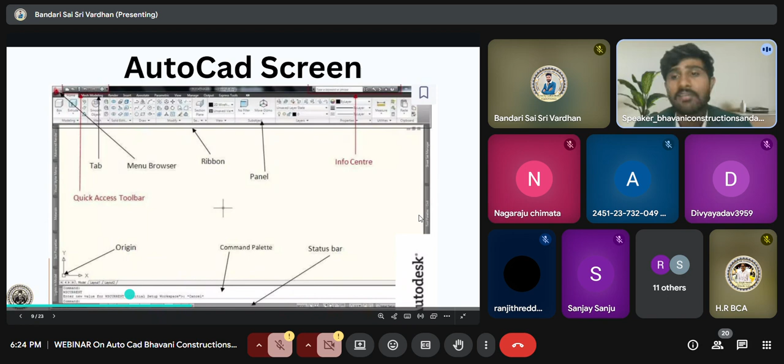At the bottom left corner, there is the origin. This is a very important thing in AutoCAD. Below that you'll have a command bar, and below that a status bar. On the right upper corner of your sheet there's a view cube, which allows you to view your drawing in different directions and elevations. This is the introduction to the interface.

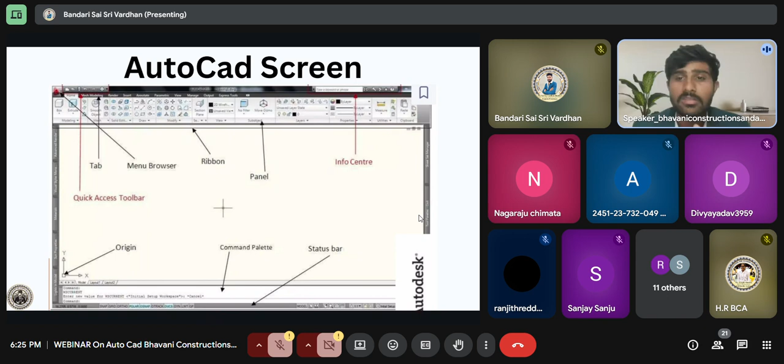Next we'll jump into some important things about AutoCAD. Let's take a look at how AutoCAD understands space. When we draw something like a floor plan section, we only need 2D, that's the x and y directions. By default, AutoCAD uses something called the World Coordinate System, or WCS. Think of it like an invisible flat surface, like the ground, where all your drawing starts.

Now if you want to draw in 3D, like adding heights or depths, you'll use something called the User Coordinate System, or UCS. This lets you change the orientation of your complete drawing plane. It's easy to do: just type UCS in the command bar and choose new, then pick 3 points to set your new plane. In simple words, WCS is your default 2D plane, and UCS is your customized 3D working plane. This gives you full control when working in 3D designs.

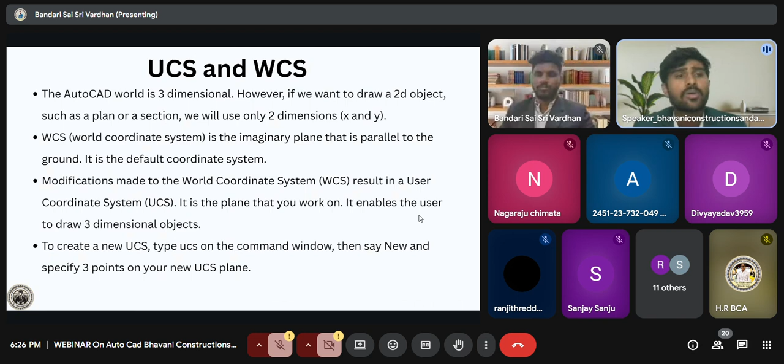Next we are going to talk about 2D drafting. In 2D drafting, we frequently use commands like line, offset, dim, array, layers, blocks, rectangle, hatch, and annotations. These are the main commands we use in 2D drafting. This is used in building plans, cross sections, structural layouts, and elevations too. The real-time applications of 2D drafting are mostly in urban layouts, highway alignments, and drainage plans.

One of the most important aspects in 2D drafting is layers.

Why it is most important: the layer system enables controlled visibility, line weights, and colors. These are crucial for separating architectural, structural, and service elements in professional drawings. Like when you draw a plan, you give layer names like column, wall, and separate layers for plumbing work and electrical work. It makes it very easy to understand your drawing.

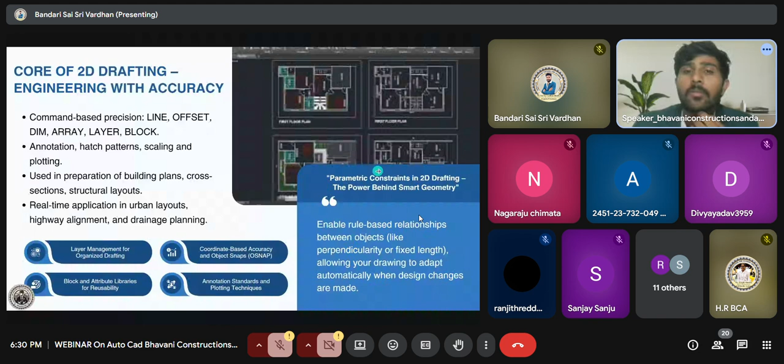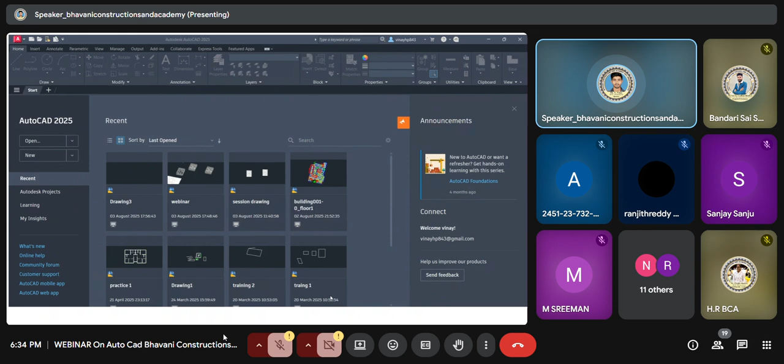As sir has explained the interface, how it looks and where we find all the ribbon and basic commands of AutoCAD - this is the place where, if you already have existing files, these files already exist with me in my laptop. I can use these files directly by clicking on the open command. But now I just want to draft a new drawing, so I'll come to this toolbar and click on the new command, and then you'll be able to start a new drawing.

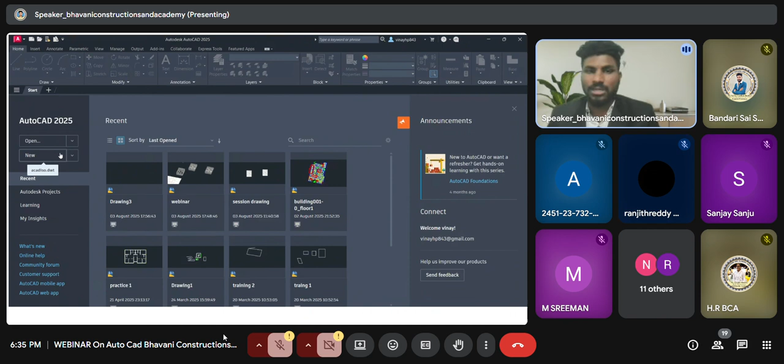As far as the session time is so constrained, we already have one drafted. We'll try to share the same. Let me open this one. Now, let me also give you a brief intro of the session.

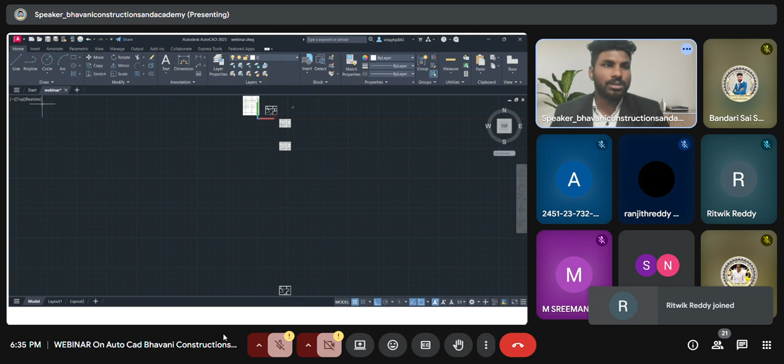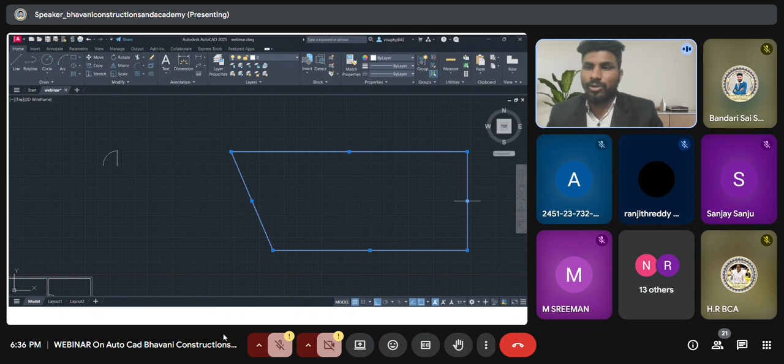So when you open your AutoCAD, you'll see the basic interface which we actually see on our desktop when you open AutoCAD. See, line, polyline - line is a command where you can draw n number of lines of different kinds. The difference between a line and a polyline is: when you draw a line to make some kind of shape, you need to manually select all four sides of the shape. But when you use a polyline, that constraint is removed - you draw the same kind of shape, but when you select the object, the whole object is selected.

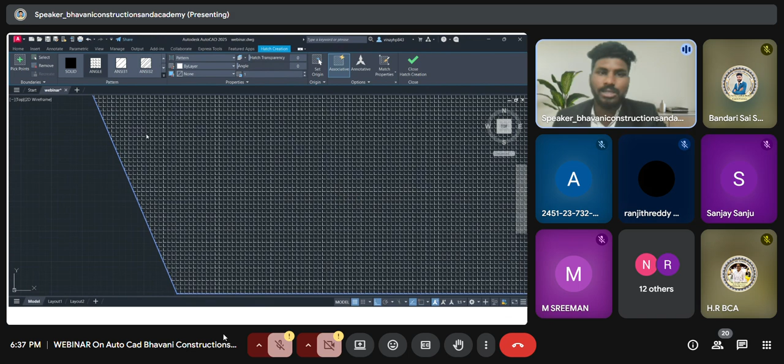This is called hatching. In civil terminologies, we have different kinds of hatching, like gradient hatch and normal hatch. For example, this is the hatch which I have given. We have different patterns of hatching - this pattern is for concrete, and this is for brick, with king closer and queen closer, different arrangements of bricks. So accordingly we give the hatching in CAD, and here we'll give some concrete hatching.

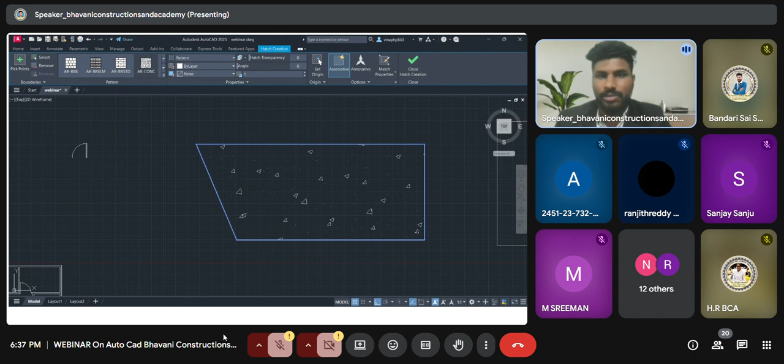Let us assume this is the drawing we have taken. This is the basic drawing plan already drafted according to the given plan on your left side. These can also be used from the setup. Generally, when you open, let us open a new tab.

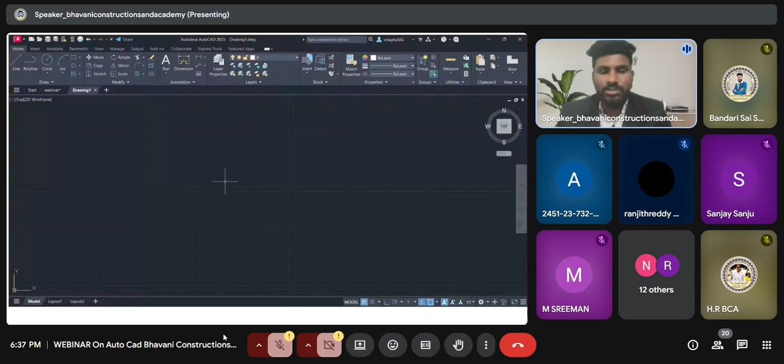Before, once you're on the interface of AutoCAD, we first give the units. Whenever you are opening, it is very important to give the units first. What units to give on AutoCAD? Generally as civil, or even mechanical, triple E, we generally use architectural. So we give the length type as architectural, then the precision as 0 to half inch, then the units as inches. This is the basic type of unit we generally give.

Once the units part is set, we need to give a grid. We are able to see on the screen now there are innumerable number of grids. AutoCAD is an endless sheet having innumerable grids - in either side you drag, you have innumerable grids.

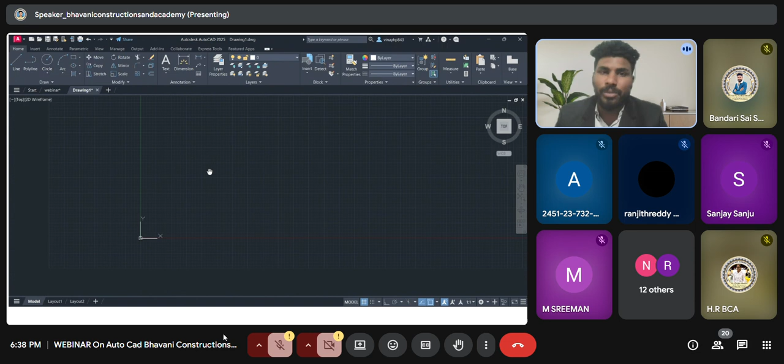So generally, what limits do we give? We enter the limit commands. Then the limit we give is 0 comma 0, that is at the center point of the coordinate, and the next point will be 500 comma 500. These are the x and y coordinates which we give to set the limit.

Once the limits were set and the units were set, now I want to draw a floor plan. Let's take the same floor plan - I'll just copy from my drawing and paste the same drawing back here. So now my plan has been placed over here. This is a 2D wireframe where I'm able to see a 2D diagram.

Now I want to change this into a 3D modeling where I should be able to see the height of the building, the rooms and all. So generally, to have a 3D view, we come to the bottom part of your page, to the right bottom part, where you'll see a command symbol of settings. There you'll see 3D basics, 3D modeling and all.

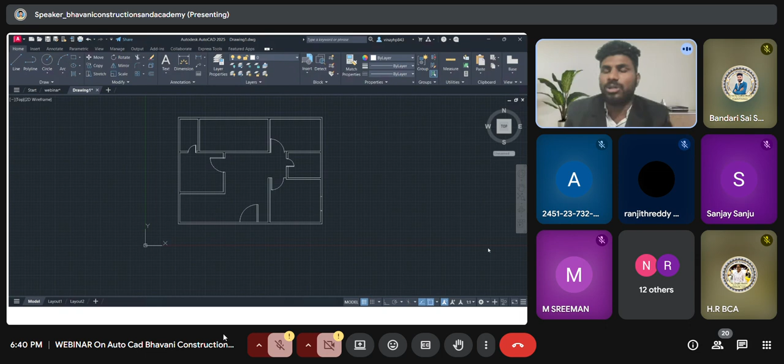Before going into the 3D modeling, let us first measure what is the length of the building. Generally you go to the ribbon where you have the dimension bar. You can directly select from here, or from the command tool you can select - if you give the dimension command, then you'll be getting the same tool.

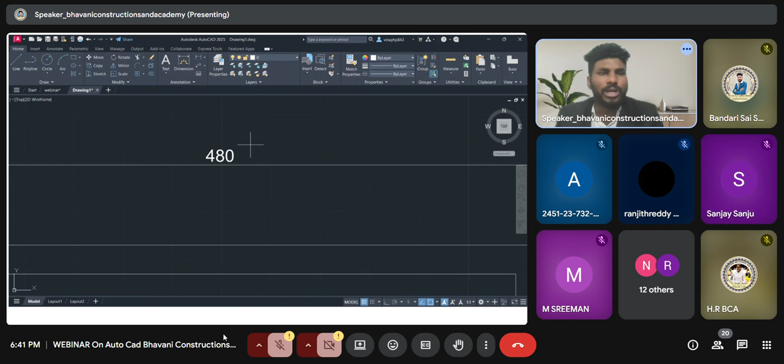So now I am measuring this. If I'm measuring this, it is giving me around 480. What is this 480? There are no units for 480 - is it mm or feet or what, we don't know. So how to change this? Already in the beginning I have changed my units, but still it is showing 480.

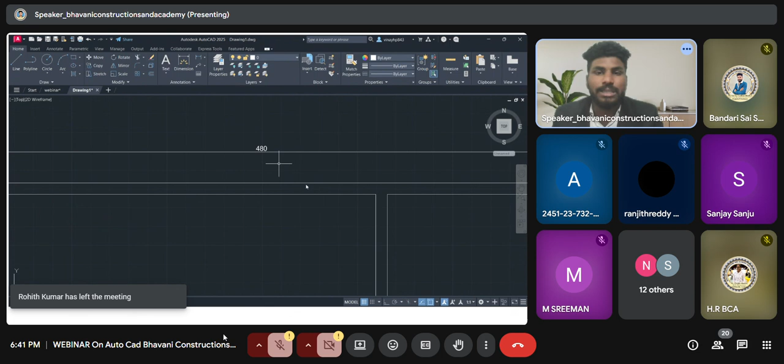So the problem is, in AutoCAD we also need to change the dimension style. We have dimension style - for that the command is DIMSTYLE, DIMSTY. Click enter, and you'll see different commands like this. Then click on modify.

It's getting hanged, I don't know why. Just click on modify.

Once you click on modify, you'll have different kinds of modifications you can do. We have arrows, we can give closed arrow, we can give dot, we can give architectural tick. It's up to you which kind of symbols you need to use. But what's our actual concern now? The basic concern is about the units.

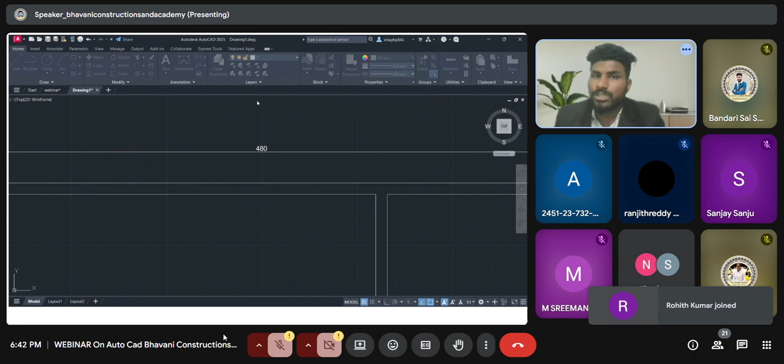It comes to primary unit. In primary unit, select architectural. So here again I'm using architectural. Then the precision, as previously, give it half inch. Then don't change anything else.

Then come to text. Always try to make the text size at least 6 inch or 1 feet. So to give a good look for the length, I'm taking the length text height as 1 feet. Just click OK. After this point, this is a very important step you need to do.

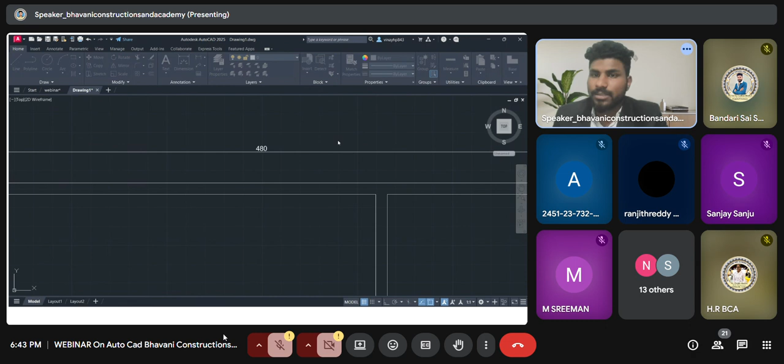After modify, it comes back to the same interface. What you do is click on set current. Once you click on set current, then close this snippet. Now you're able to see this was changed to 40 feet.

If you have one single bar, it is feet. If you have two lines in the way, it is inches. So now the width and the length of the building is 40 feet. And then you can also measure this.

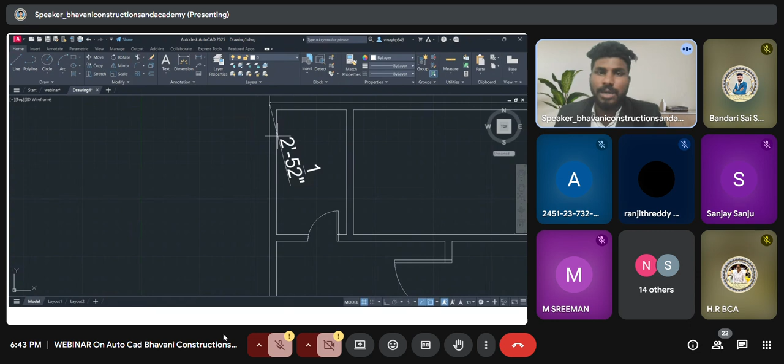Once you set these commands, it's not important to do it again and again. Once you set it, the same things will be set out. So you can see now it is 30 feet. So this is 30 feet and this is 40 feet. Accordingly, we have divided all the rooms.

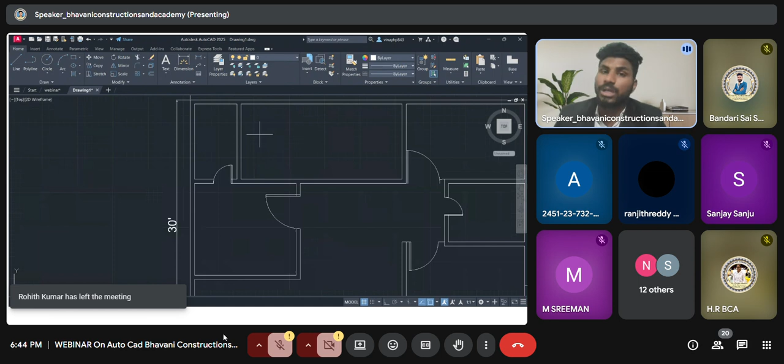The other important thing, while doing freelancing or working somewhere, you also need to measure the lengths of each and every room, and write it over here. Same way, just go to dimensions, measure this.

So you see this is 9 feet, and if you see this is about 19 feet. So this is 9 by 19 feet, and accordingly you can give it.

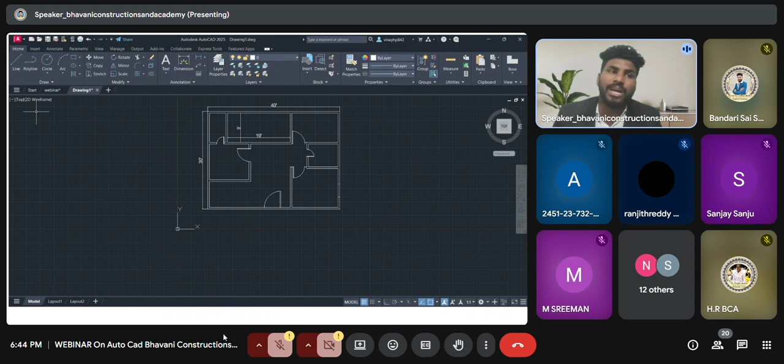So now this is the basic 2D drafting. Now I want to convert this basic 2D drafting into a 3D modeling. So now that's already done, I guess.

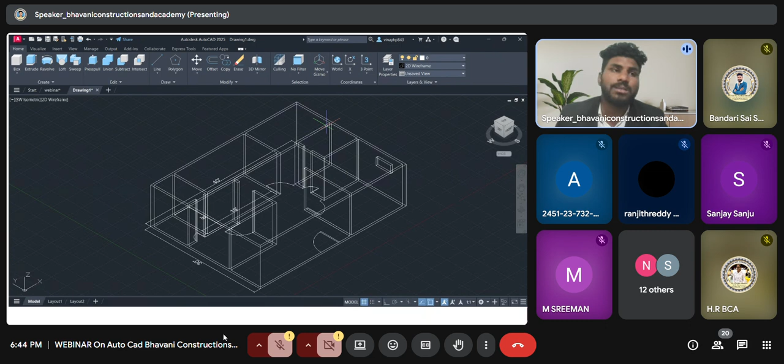Let me go to 3D basics. Once you go to 3D basics, automatically the top ribbon is completely changed. If you're able to see, the whole ribbon will be changed. Give me a second.

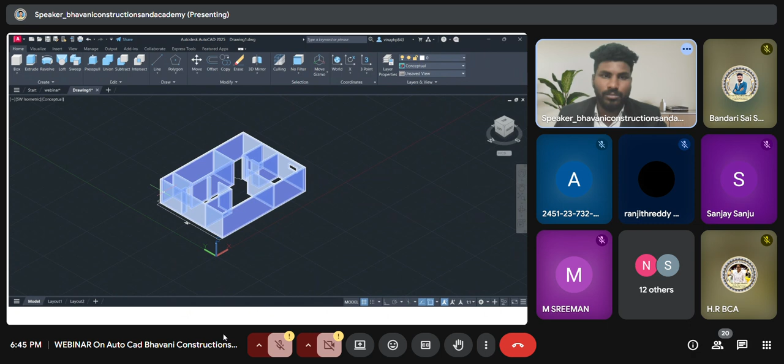So this is the basic floor plan which we have drawn. Now it is being shown in the isometric view. You can select any of the isometric views—southeast, southwest, northeast, northwest. Generally we used to take southwest. So once you're in southwest, you'll be able to see the 3D modeling of this.

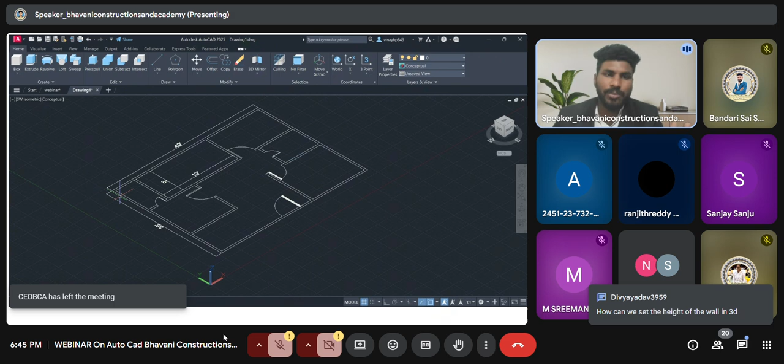Now generally the next step is to select region. Enter a region command, reg, then select the whole building. So once you give the region command, select the whole building, then click enter.

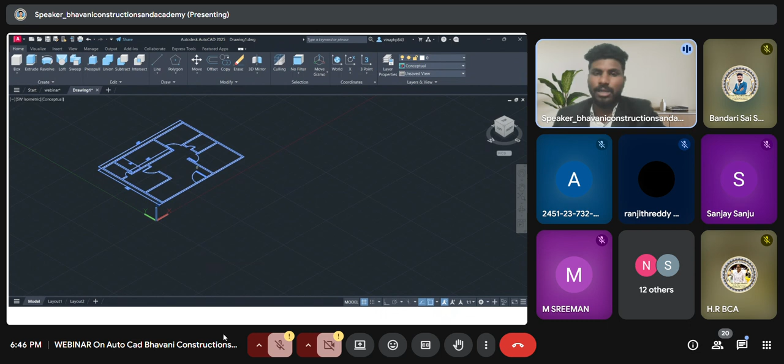So once it is done, let's keep it in 2D wireframe only. So once it is done, the region command is done. Now go to the presspull option here. You can use presspull as well as the extrude command. Both work the same.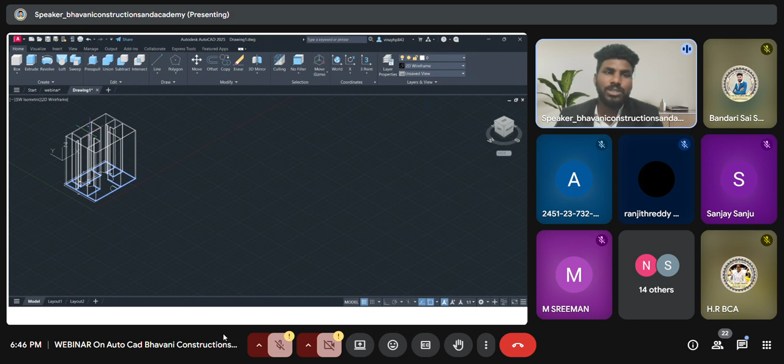Just come back here, select it, then put your arrow mark to the top. Generally we give the ceiling height of 10 feet, give it 10 feet. Now you're able to see this as the 2D wireframe.

Just go here, click on this, change the command of the visual style to conceptual. You can use conceptual as well as realistic, both work the same. We generally use conceptual here. So once it is done...

So this is your 3D modeling, and then you can use the orbit command to rotate this building, and you can see these are the rooms, and we actually have doors and all here and there.

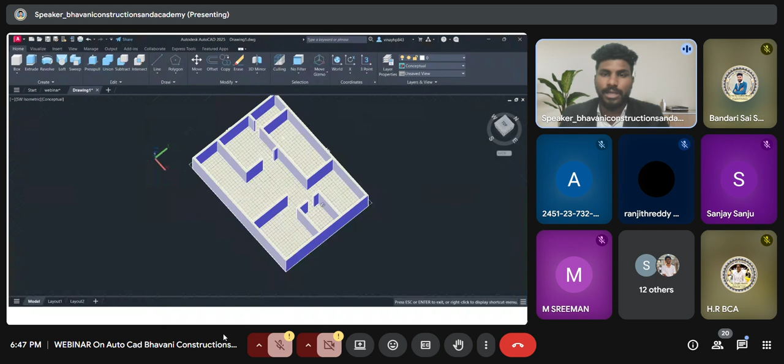So for example, now I want to give a window over here. Let us assume I want to give a window over here. So generally what I'll do, I'll take a polyline here, just come here, I'll start. Let's give, and always remember to start.

This is the ortho symbol. If you start ortho, it gives only linear directions in all four ways, it doesn't go here and there. If the ortho is off, it moves in 360 degrees. If it is on, it goes in 90, 180, 270, and 360.

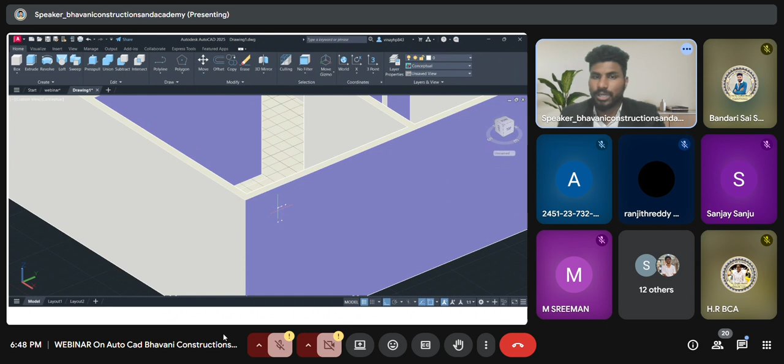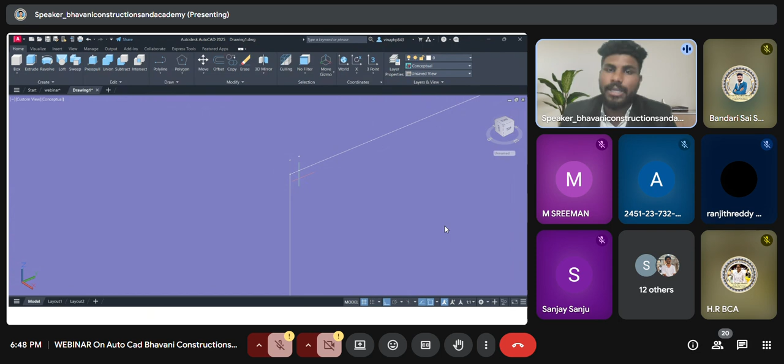Now let's give a window of 3 feet, then 4 feet of width, and then another 3 feet, and then select. This is object snap, and the object snap is on. That's the reason you're able to see a green color box there. If object snap is off, you won't be able to see where to plot this point and where we can join it. So turn object snap on and drag it here.

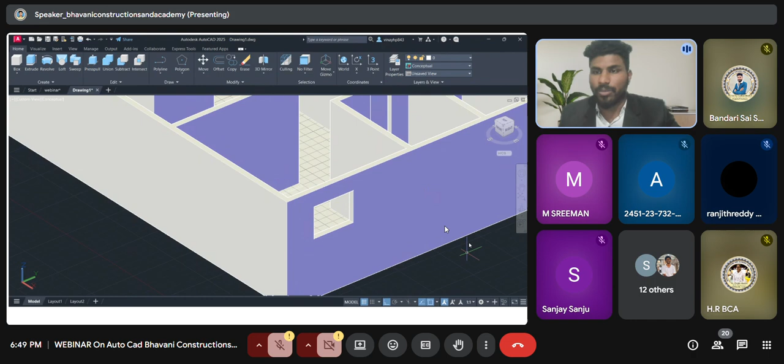Now click escape, you are done. Then again go to press pull option, select this, and you're able to see the box is moving in. Just go here, select here. Now a window has been created. You can again select orbit command and check - see, there is a window created here. So if you want to make any such changes, give a window, a door, or whatever it is, you can actually do it using this way.

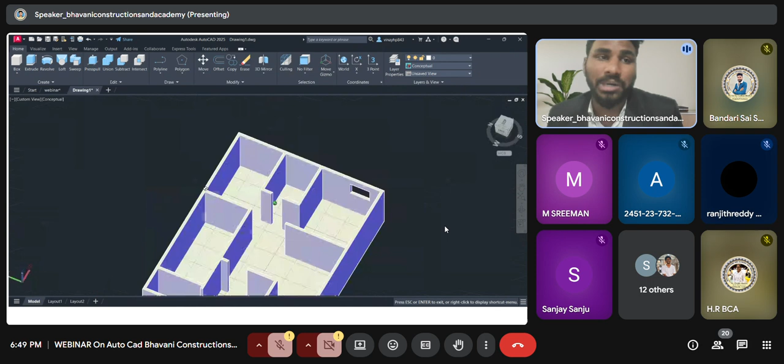Got it? So hope this was clear how to convert a basic 2D modeling into a 3D one. I hope this helps you at points. If you have any doubts, we'll have a Q&A session in the end, and in between if you have any queries, you can also give it on the chat box.

How can we get the height of the wall? Yeah, you can get the height of the wall.

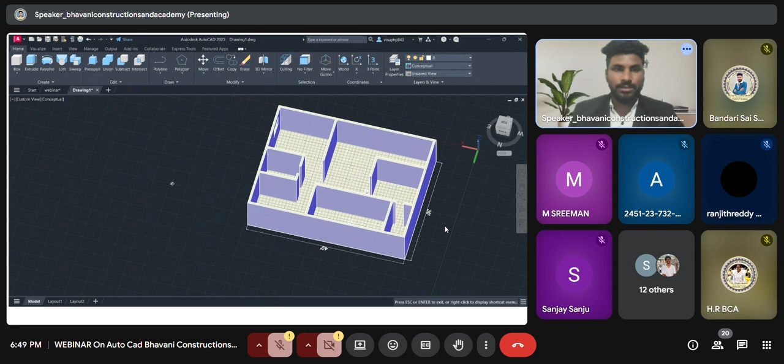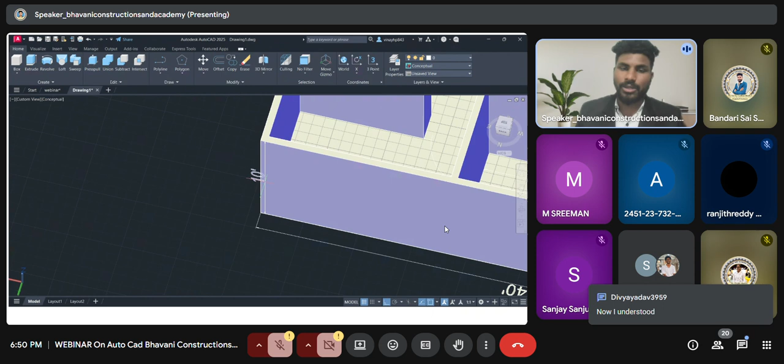Just again, go to dimension style. Height of the wall, generally, what is the ceiling height we give is 3 meters. See, again, if you enter the dim style and select the bottom coordinate, you'll be able to see it is of 10 feet. It is of 10 feet. The ceiling height generally we give is 3 meters.

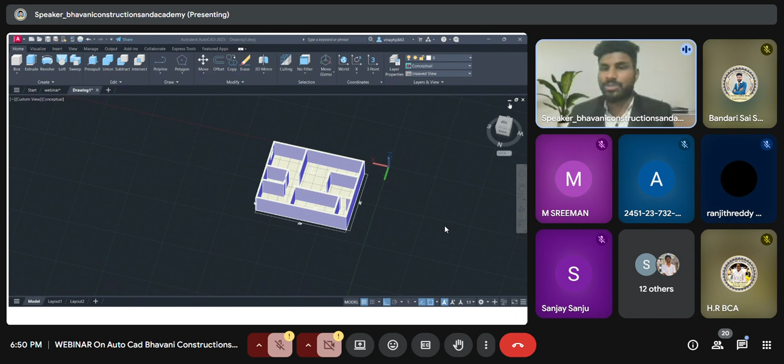Else, if there is anything, please try. Now I understood, yeah thank you Divya Yadav. Else, if you have any other queries, please try to ping on the chat box, we'll try to help you out.

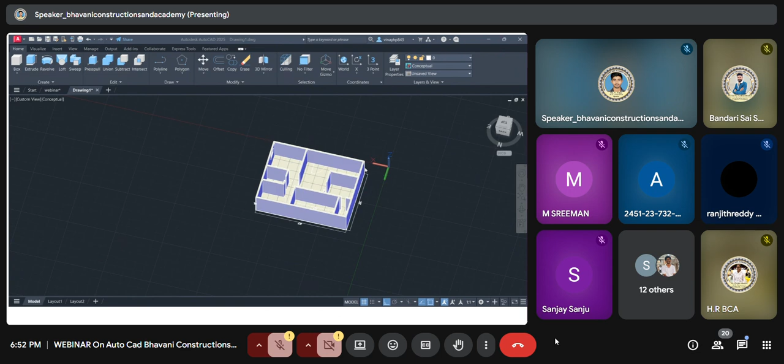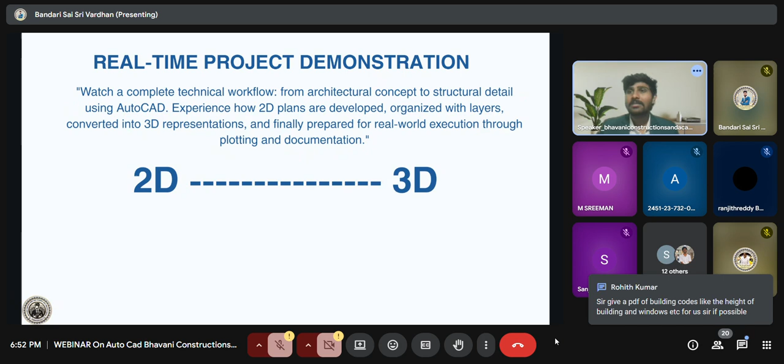And Vinay, you can go ahead. I would like to take a moment. Please give me a moment. There was some query, Vinay, could you please address it? Yes, Rohith Kumar, for sure.

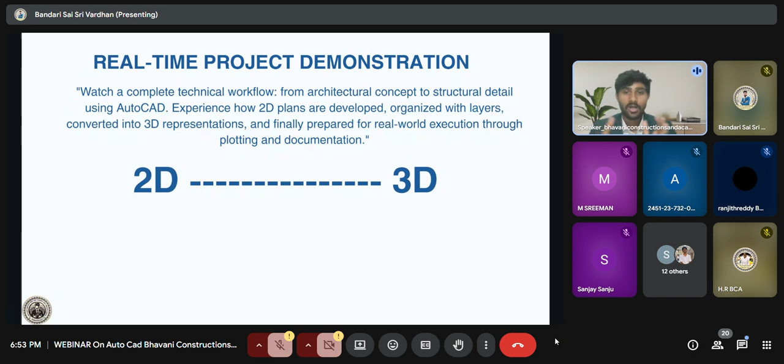So, as Bandari Sai Sri Vardhan said, I hope you all understood the process how to draft a 3D modeling from 2D model.

Now I just want to share five essential stages in AutoCAD workflow from draft to deliver. Generally there are five stages. One is drawing setup. In drawing setup, we usually define units first, and then limits. Generally the lower corner is 0 to 0, and the upper right corner would be 100 to 100 or 100 to 500.

This actually creates a drawing space for you and grids, as Vinay sir explained. After that, we are going to configure your layers in AutoCAD, and then line types - we have to choose what kind of lines we want in that drawing, and these are all important to align your project to the industry standards.

It means if you use the same kind of layers, same kind of lines for every element in the drawing, it will mess it up - when a professional person sees that drawing, he'll be able to understand that he is not a professional in this particular field. So use configuration layers, line types, and text styles to explain your drawing, then you are going to meet industry standards.

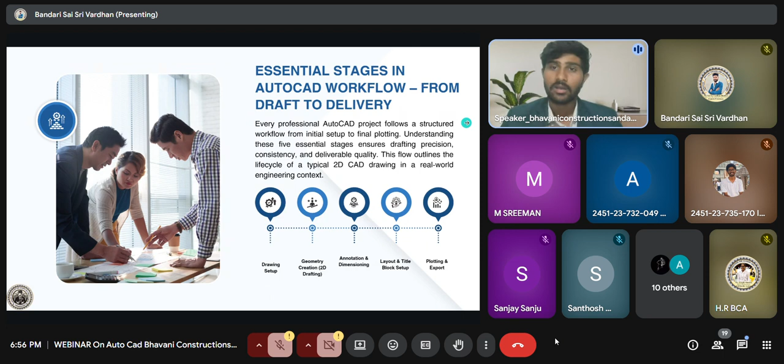Next, effective drawing isn't just about drafting or just drawing and leaving it. It's about evaluation, about making corrections, about making results, measuring your results, and adjusting strategy, like a performance review.

Analyze your drawing accuracy, plotting efficiency, and measure the completion time versus estimation time. That means comparing the estimated time to complete a drawing with the actual time it took. Then take feedback from trainers, clients, and project leaders. Use that feedback to refine your workflow and adapt your CAD practices.

These are all important to develop your skills, like advanced skills in dynamic blocks and next generation tools like BIM and Revit.

Some questions like: are my drawings dimensionally or geometrically correct? Do they meet academic or industry standards? Was the correct use of commands, layers, blocks, and annotations demonstrated in my drawing? You need to ask yourself these questions after completing your drawing, and if necessary, modify and upgrade your skills whenever needed.

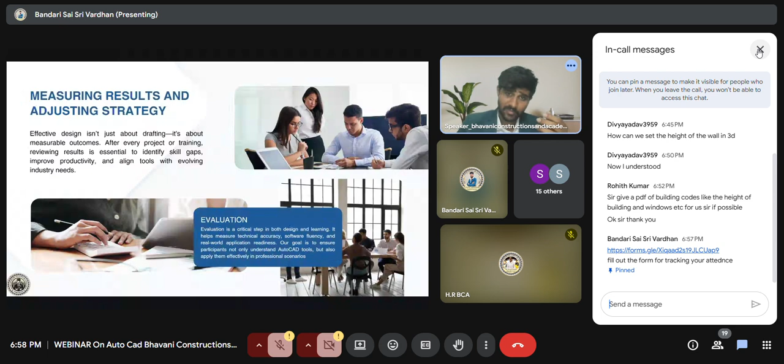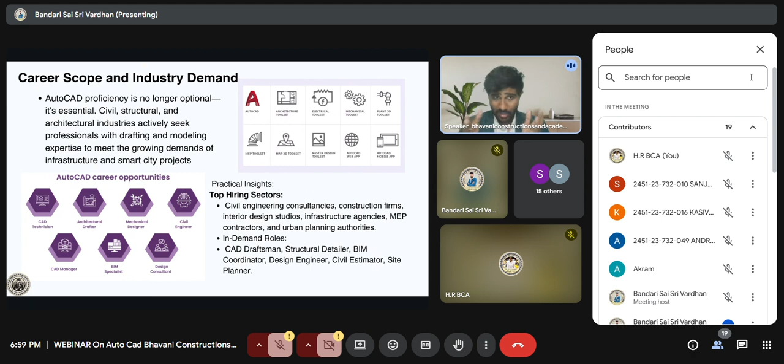Then we are going to take a look at career scope. As an AutoCAD professional, there is a very good career scope and industry demand across the world. AutoCAD provides a vast range of career opportunities, with international salaries in UAE, Singapore, Europe, and states like Ireland ranging around 1.5 lakh to 3.5 lakh per month.

And if you look at the industry trend over the past 2025 analytics, over 65% of civil job postings on LinkedIn or Naukri now mandate that CAD or BIM skills are necessary.

AutoCAD is not only for jobs but also provides opportunities as a freelancer or entrepreneur, as Bandari Sai Sri Vardhan said before. You can earn up to 500 to 2,500 per project through freelancing CAD, and it is ideal for students or as a side income opportunity.

Even the government has adapted AutoCAD, like in DPRs, road designs, PMA layout plannings, smart city tenders, and CPWD submissions. AutoCAD is very useful there too, so you can also earn money through that.

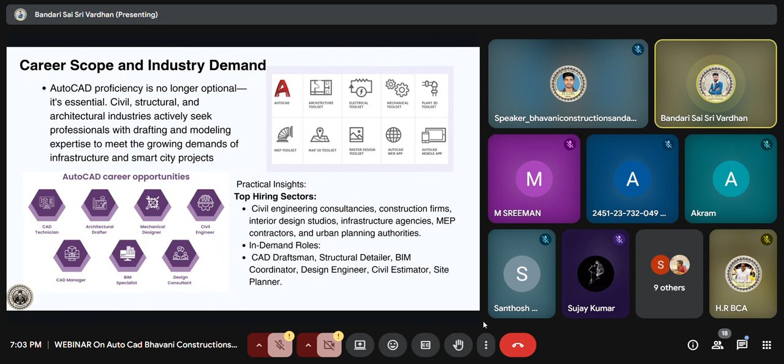The other very important weapon in your hand is LinkedIn. Try to have innumerable LinkedIn connections. People feel LinkedIn is not useful, but believe me, it's a very vast tool where professionals also look into it. Always update your LinkedIn profile and maintain your updates there, and you'll definitely get a good approach. I hope I addressed your concern.

I can hand over the session to Vinay, I guess.

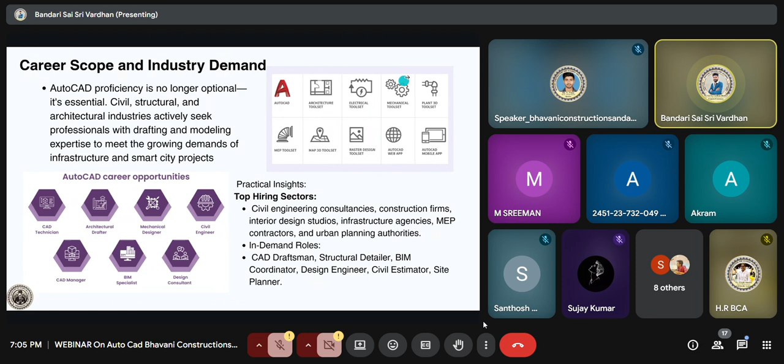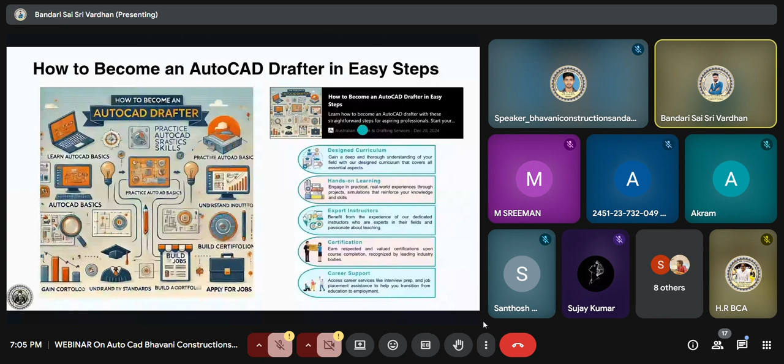Okay, I don't know what's the issue, so I'll continue from here. So here we have how to become an AutoCAD drafter in very easy steps. According to a survey conducted by Australian Design Drafting Services, let's go there.

You're able to see? Yeah. So this was a survey conducted by Australian Design and Drafting Services on how to become an AutoCAD drafter in easy steps. It was drafted in very simple 8 steps, how to become a drafter easily.

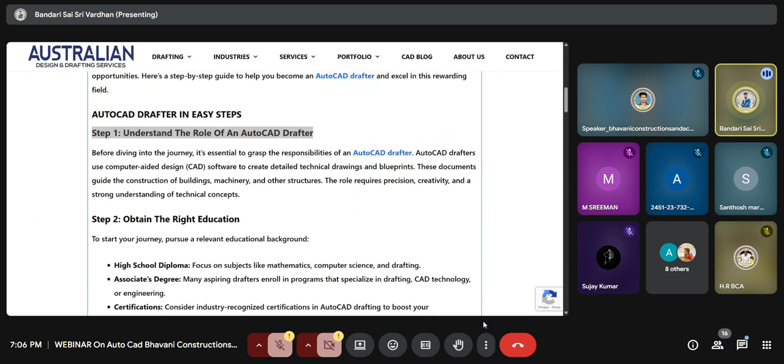First, you need to understand the role of an AutoCAD drafter. What is the major role of an AutoCAD drafter? What are the aims he needs to do? As a CAD drafter, before anything, you need to have a good command on the software, then you need to be technically fit, and your role requires precision, creativity, and strong understanding. These three are very, very important.

Why is precision important? No one in India or in Telangana was ready to give even a cent of land. They were not ready to leave even a cent of land. So according to precision, you should be very perfect.

And then creativity. Clients may have different kinds of concerns. They may come to you with only 100 square yards but also want what we call a villa there, or ask you for a duplex building. So accordingly, even if not fulfilling their dreams entirely, we need to give a good thing for them. And most importantly, if you are technically fit, you can always suggest the right path to them, like suggesting sustainable construction practices.

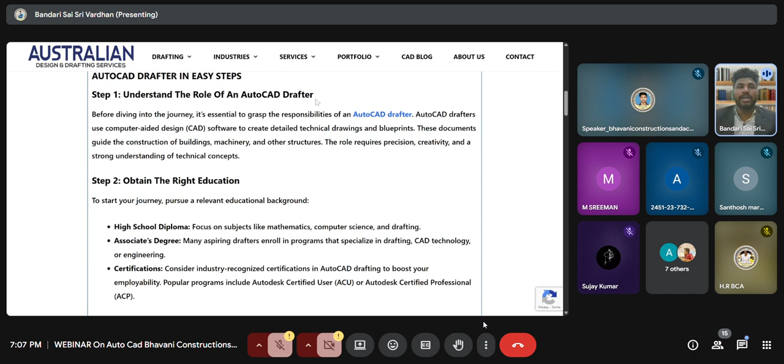So this is the very first step, the role. Then you need to obtain the right education. Most people, this is a very common thing I've observed, do their intermediate then come to engineering without any real choice. Most civil engineers, I'm sorry to say, join the civil engineering stream without any choice. I hope the engineers here were not in that situation. But anyway, after understanding the legacy of this engineering, definitely don't leave it forever.

Obtaining the right education means you first complete your diploma, then get a degree, then get different types of certifications. What are those certifications? You have ACU, Autodesk Certified User. Even Santosh asked about this - if you want to improve your portfolio, do these kinds of certification programs: get Autodesk Certified User, Autodesk Certified Professional. These certificates show that you are very proficient in the field of drafting.

Definitely, wherever you go, you'll get a job, or if you want to start your own company, you can try that too. You have different types of institutions - Institute of Engineers, National Academy for Construction, CDI (Contractor Development Institute), and numerous other sources. Try to get collaborated with them. They are always student centric, conducting various webinars and seminars, and they also give you courses that help build a good career.

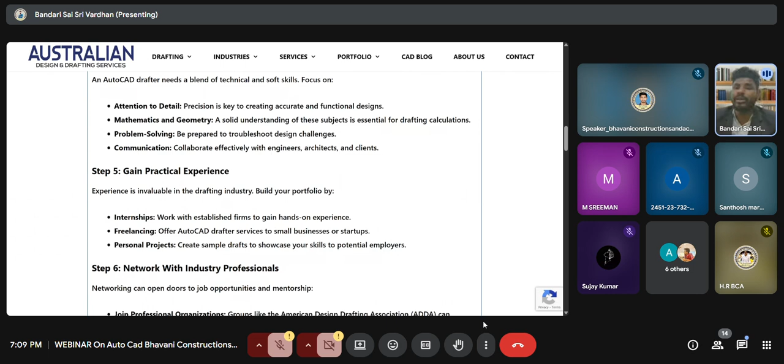Then learn AutoCAD software, that is very mandatory, and develop essential skills, then gain practical experience. How do you get practical experience? Wherever you get a chance, try to do internships, try freelancing, try to propose various projects. That helps you out.

And then network with industry professionals. As a civil engineer, it's very mandatory to have a vast network. Wherever you go, try to get their contacts and use them - that will help you out. Don't hesitate or feel ashamed to share your data. Try to have a visiting card in your pocket.

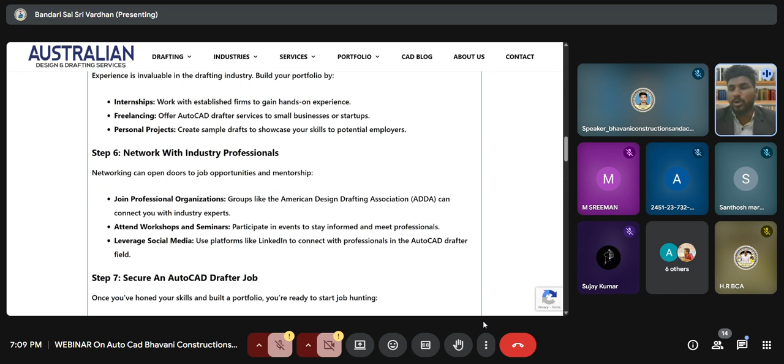Wherever you go, tell about your company. Definitely you'll get a good network. Then secure an AutoCAD drafter job if possible, try to get it. If not, build it up yourself, and continue learning and growing.

There were days when AutoCAD, then BIM, then Revit were the main tools, but now we have very advanced software. So wherever you are, continuing to learn and grow is very important. Without learning, you can't grow up.

Now we have software like Revit, AutoCAD, SketchUp, BIM, all this. But the present scenario in civil engineering competence is Tekla and ANSYS. These are the software which are booming, so you also need to work on these important tools.

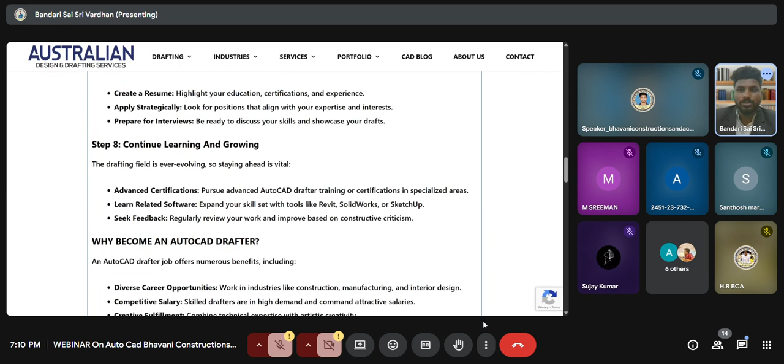So this is about the various easy steps on how to become an AutoCAD drafter. Let's go ahead.

Before telling you about the certification program and the internship, let me also show you our website.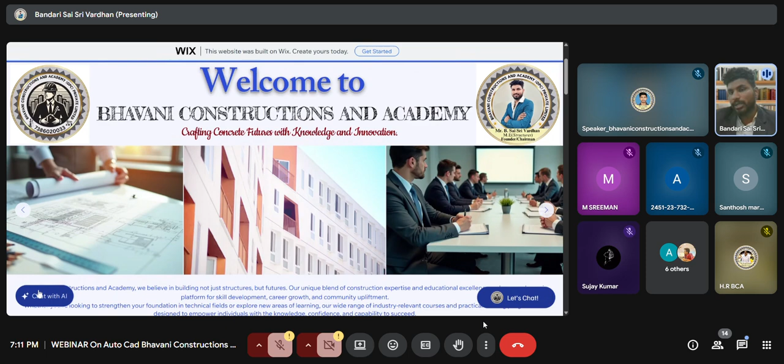You can see the two bottom icons, chat with AI and let's chat. If you chat with AI directly, you can get the data whichever you want. And once you become a member with us, you'll get all the updates, webinars, seminars, internship opportunities, and job offers whenever we post them.

That is all about it. So let us come back to our presentation. What about the certified AutoCAD program plus internship?

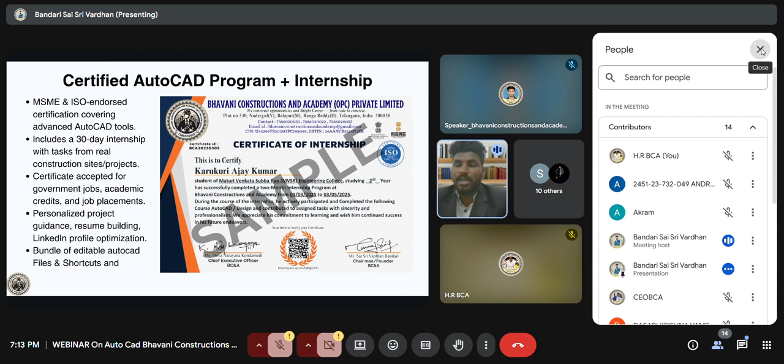Our company's MSME and ISO endorsed certification means wherever you get a certificate from our company, it is completely authorized and government recognized. After this session, we also plan to have a 30-day internship with tasks from real construction sites and projects, which you can enroll for. This certificate is accepted for government jobs, academic credits, and job placements too.

And yes, it is personalized. We also help people get personal project guidance, resume building, LinkedIn profile optimization, and more. Our team is spread into vast areas where everyone helps you out as needed.

If you enroll for the program and submit the feedback form, you'll get a bundle of editable AutoCAD files of 10 different floor plans, plus shortcuts and various AutoCAD commands, and bundles of AutoCAD notes sent to your mail ID.

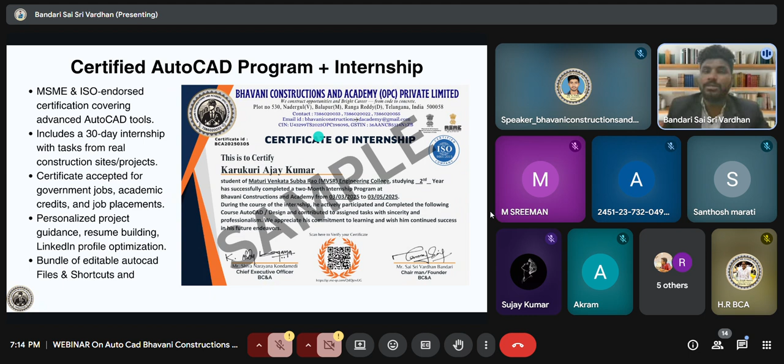Good evening everyone. On behalf of our organization team, Bhavani Constructions and Academy, I would like to extend our heartfelt thanks to Mr. V. Vinay and Mr. Bandari Sai Sri Vardhan for conducting such an insightful and engaging webinar on AutoCAD. Your session was not only informative but also very practical, giving us a clear understanding of real time applications in the field. The way you shared your knowledge and experiences truly added great value to all the participants.

We sincerely appreciate the time, efforts, and expertise you both brought into this session. It was a pleasure learning from you. Once again, thank you for making this webinar a success. We look forward to more such valuable sessions in the future. Warm regards, Manisha, HR, Bhavani Constructions and Academy.

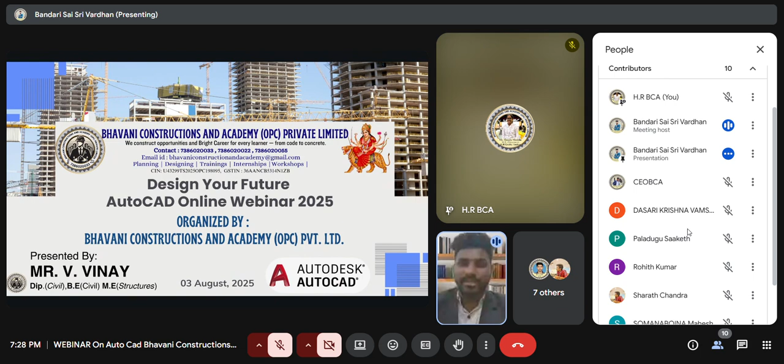I have to thank you guys for welcoming me to this wonderful session. It was so insightful, and we felt we need to thank Santhosh, Sreeman, and Divya for sharing their concerns and thoughts, and making this session so interactive. Thank you so much to all the team who attended the session.